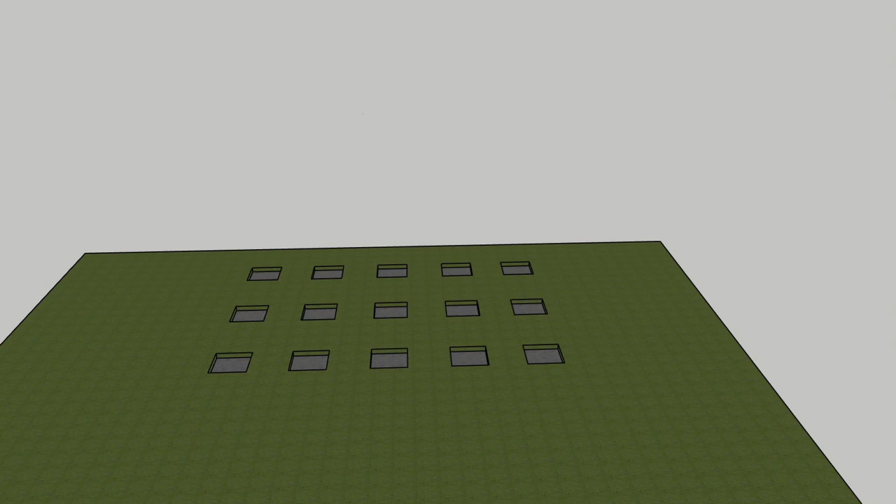Today we're going to be showing a video on how our garden rooms are constructed. This example is for a timber base, so we basically start off by digging some holes in the ground. They're going to be 40 centimetres by 40 centimetres by approximately 50 centimetres deep. It will depend on the ground makeup where you are.

Not all ground makeups are suitable for this design, so it's imperative this process goes correctly to ensure that you have a garden room that's going to last many years. These pads are normally about 1.2 to 1.5 meters apart. We normally put 3 rows in. That will cover us up to garden room depths of 3.6 meters. If we went beyond this, we'd need to put an extra row in.

So we've got our holes all dug in here. From there, we put a base pad in. So basically, these are designed to keep your timber floor off the ground. Timber framing largely uses treated C24 grade timbers. It's class 2 timbers, so it's not designed to be used in direct contact with the ground. So if you want your garden room to last a long time, you need to keep a good 50mm air gap underneath to prevent the timbers getting in contact with excessive moisture.

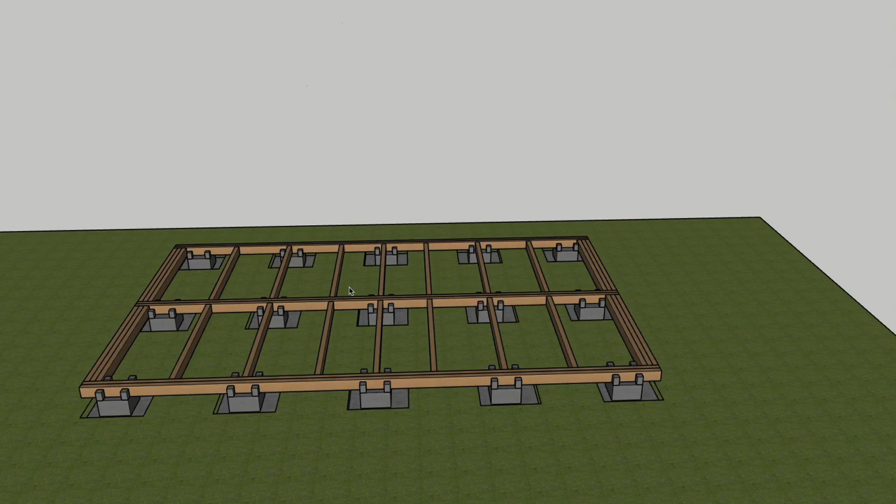From here, once all that's in and level and happy, we build some floor joists in for you. And as you can see here, we have got a double trimmer at the front and the back. That is to support the walls. If we only had one timber there, then it's going to allow too much movement in the wall timbers. On the sides we've got a triple. Again, we've got a double to allow your wall to sit on, and then we've got another timber which later will support your floorboards.

On the ends, they're all screwed through from both ends, and they are then kept in place using joist hangers. So they're kind of belt and braces to hold it all together. Floor is probably the most important part to get right, because the last thing you want to have is a garden room that lasts but the base starts to fall away over time. So this is a good proven method to keep your garden room off the ground and stable.

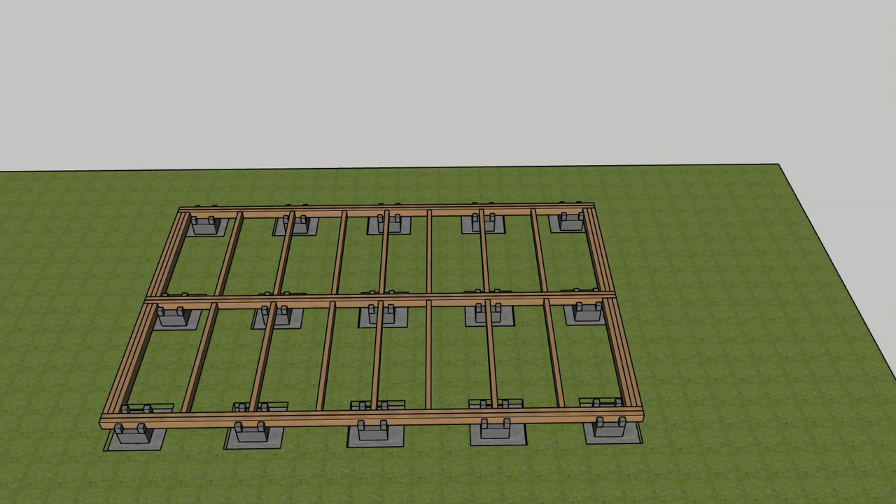Once we've got your floor timbers in, we will put some insulation. We use 50mm PIR insulation. That's similar to Celotex and other brands like it. So what we do to stop that Celotex falling all the way to the floor, if there's any expansion and contraction of the timbers, is we put a 50mm roofing batten along the bottom edge of the joists, and then the insulation just goes down and sits on top of that.

You want to make sure, obviously, all these are nice and tight when they go in. Any air gaps where cold air can be sucked into the building is going to risk water vapour forming and then rotting out the bottom of your garden room. So you want to make sure it's nice and tight. Any gaps can be filled with expanding foam.

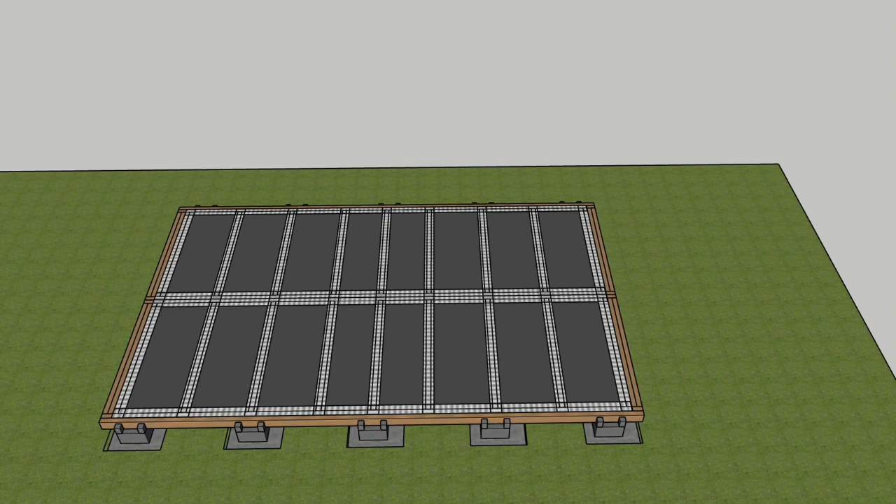Once all this is in, we then insulation tape. So it's a foil tape. We tape up all the joints, overlapping all of it. One, it helps reduce thermal bridging on the timbers by reflecting heat back into the room, and also eliminates any risk of air getting into the build.

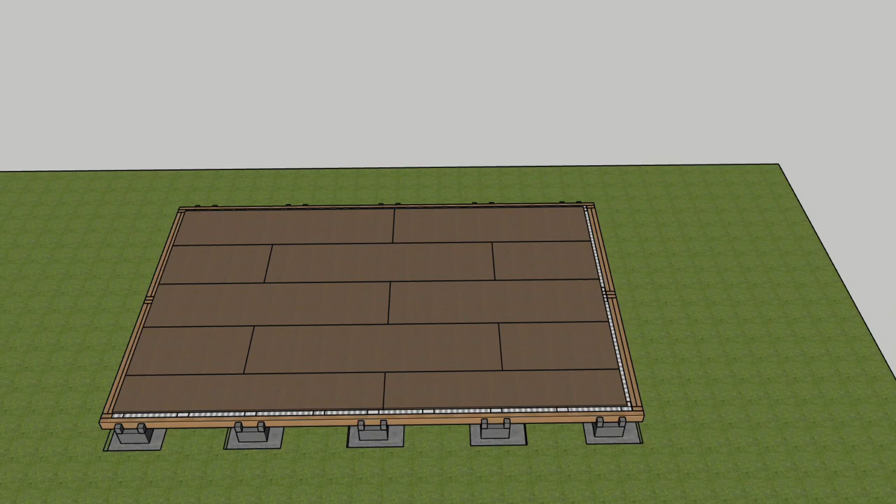On top of this, we installed 22mm caber flooring. Now our studs are at 600 centres, unless there's heavy equipment going in. So 22mm gives you a nice solid floor. All of it's glued and screwed down to the joists, so there's no chance of that moving. Nice, strong, stable floor. We then start with wall timbers.

So the wall timbers, we use a 4x2 stud frame, and as you can see here, it's going to be quite strong. We've got all these timbers at the front here, and there's a reason for that. We've got our lintel up here, and we need to ensure that our lintel is properly supported. We have 2 timbers underneath it, so that gives us 94 millimeters of bearing space to transfer the load of the roof that's going to be pushing on this top plate down onto your wall studs.

We put an extra one in here. That's simply so we can fix the lintel through to these and help tie all that together. On the corners you want a double trimmer here, and then that will allow this wall stud to be fixed straight through to that.

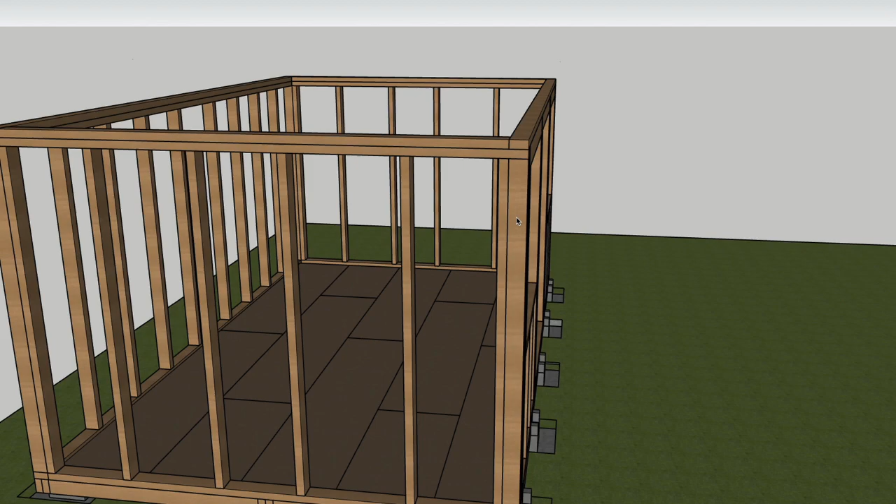These windows are 1.2 meters wide, and the French doors will be 1.4 meters wide. For this, our calculation came back with a 5x2 or a 47 by 125 millimeter lintel. That is doubled up, and they have to be bolted together to ensure they act as one.

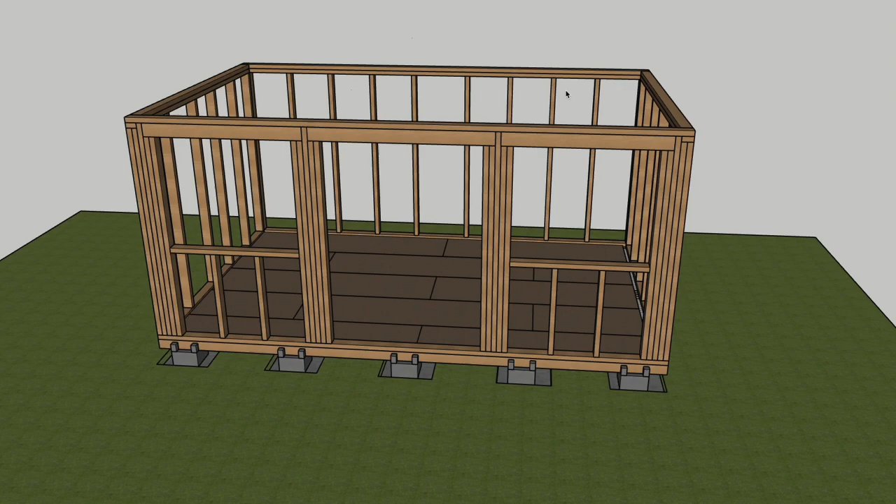We then have a top plate. This holds everything together. It also helps distribute the weight of the roof evenly down throughout all the studs, and the same reason for the back. We've got a double trimmer at the top, so if you've got a ceiling joist, roof joist in the middle of that, it's going to help transfer that load across to your upright studs. And that's basically your studs.

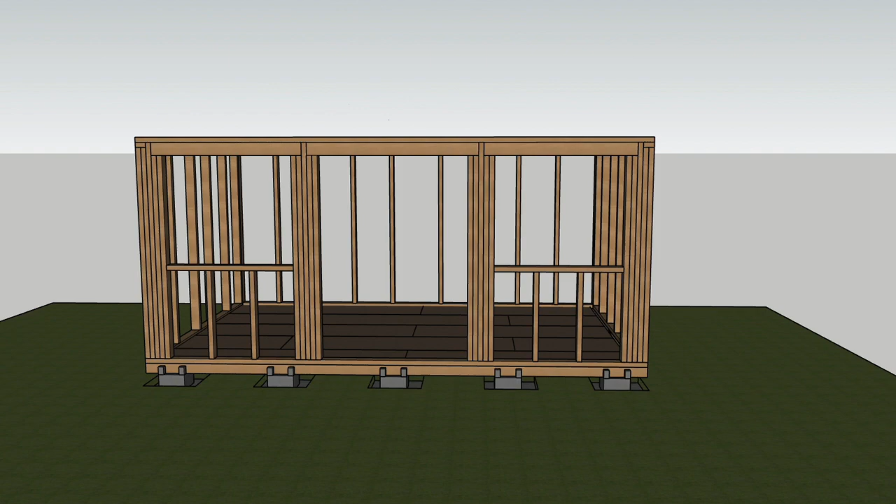The only thing we've not drawn in yet is our centre noggins, and that's to help tie all the walls together and stop any bow or twisting as the wood settles over time. Okay, so once we've got all our wall studs in, we're going to install OSB sheathing. So this is oriented strand board, sometimes called Sterling board. We use 11mm thick boarding, and the whole idea of this process is to strengthen the walls.

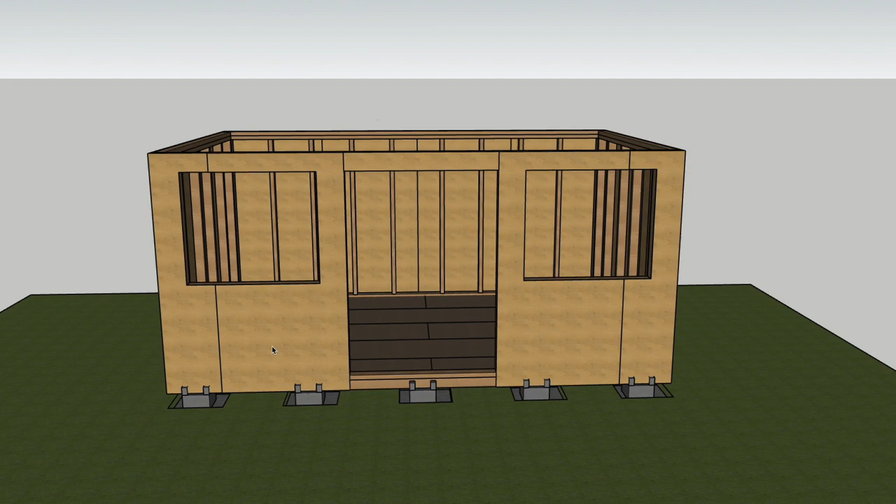At the moment, without the sheathing on, you would have a risk of buckling and twisting. Sometimes under wind force, you've only got to look at an old shed. When you look at an old shed, it's no longer upright, it's all twisted and buckled. And the whole idea of this OSB sheathing is to stiffen up the frame, make sure that it can't move. Okay, we nail this every 12 inches onto all of the studs, and that then holds it nice and solid.

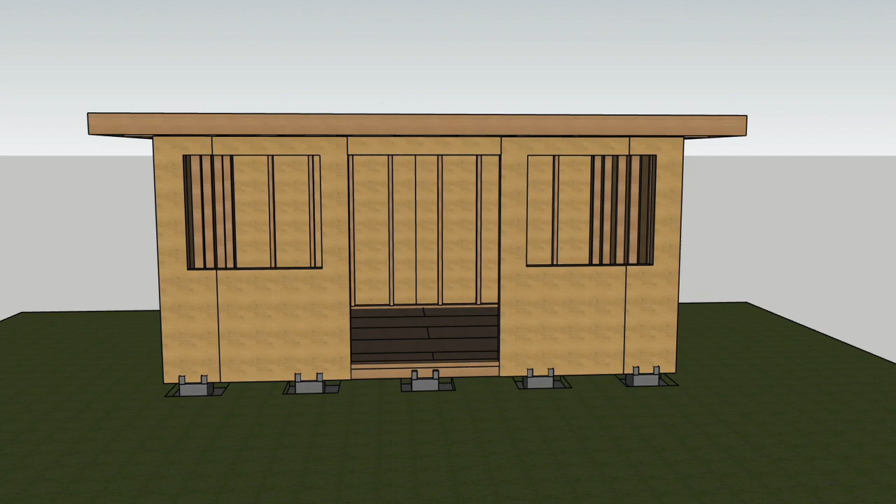We then install roof timbers. So as you can see up here, we've got all our roof timbers in. We always put this perimeter timber on, and there are 2 reasons for this. One, as it's fixed through here, it prevents the ends of these timbers from twisting over time. And that is the very same reason you have to put these noggins in the middle as well. It's just to help stop those timbers from moving over time, because they can twist and buckle. Wood is a natural product, so it will move over time, and the idea is to prevent that movement, so then it's forced to set in a particular way.

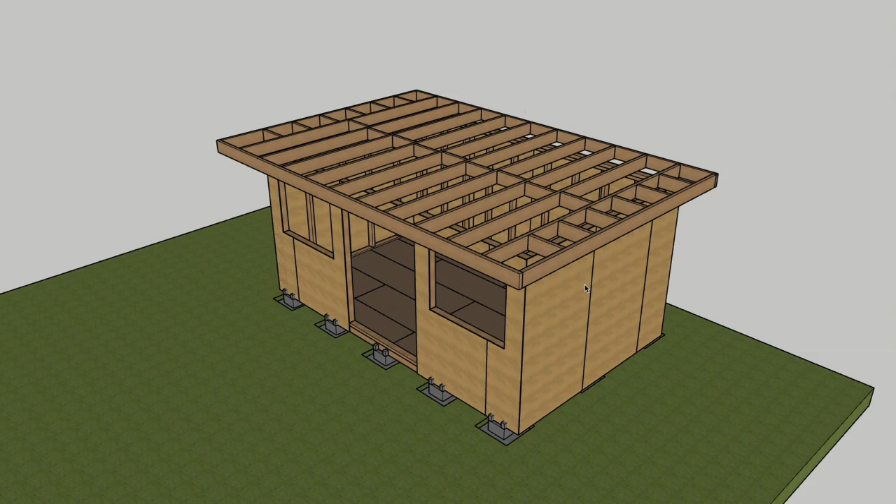We've got our noggins coming across here for our overhang. We normally do a 300mm overhang, and there's a reason for this. When rain is coming down, you want the roof to take the burden of the rain. The more water you have going on your cladding that will be on the outside of this garden room, the greater the risk of it rotting. So you want to make sure that this overhang prevents as much water as possible from hitting the cladding. It also helps prevent a little bit of splash up from the ground as well.

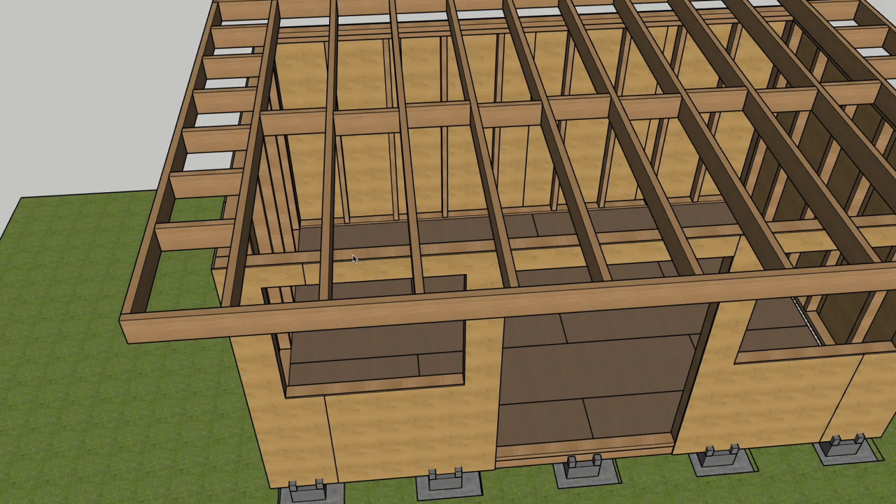So all these timbers are in. We use upside down joist hangers across here to tie them into the top rails of the garden room. This will hold all your roof in place. It'll be nice and rigid, it's not going to move anywhere, and it also helps with uplift from wind. So when the wind comes in and it blows under here, there's a risk of roof movement unless you fix it down sufficiently.

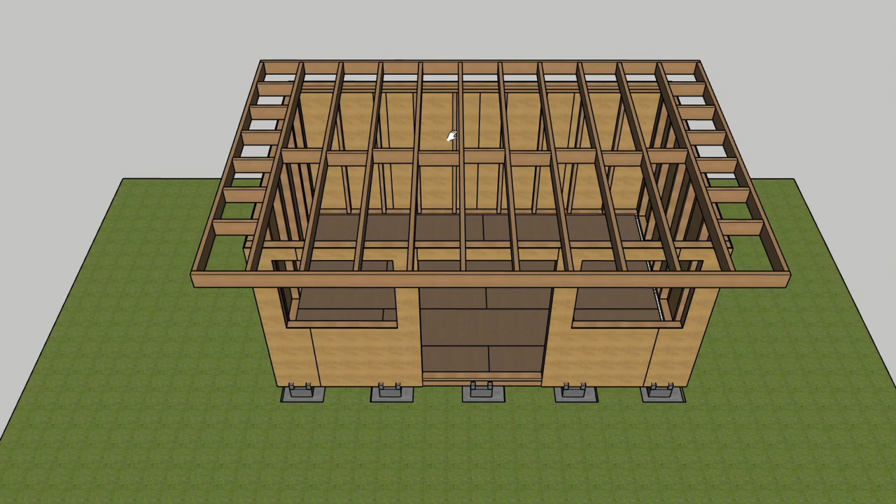Right, so once we've got all those items in place, we then look to put the OSB lower deck on. So again, similar reasons for the walls. This sheathing will help stiffen up the roof structure. We use 11mm OSB to help reduce the thickness or the profile of the building to give you as much headroom inside as possible.

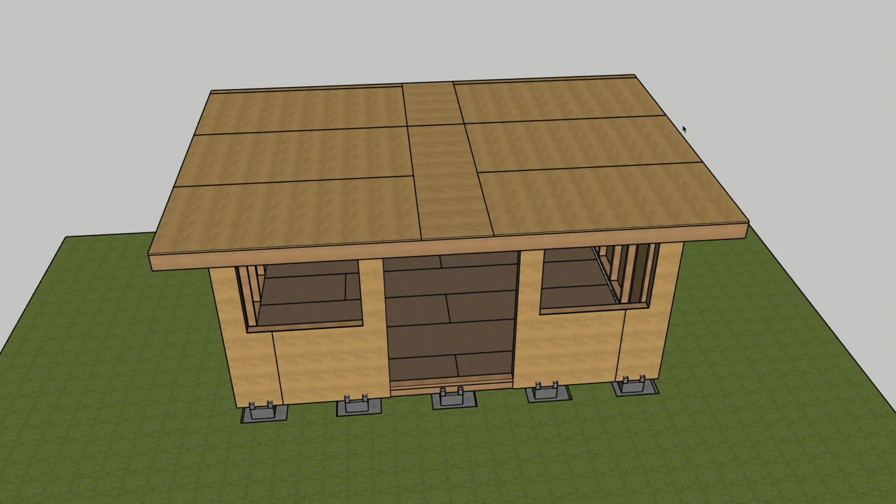Once all this is screwed down, we then want to install a parapet. So this is a 4x2 parapet that goes all the way around the garden room. This will help stop the insulation coming out. It will give you a nice solid surface for your fascias to nail onto, and also for your EPDM trim covers and for the top deck that will go on in a second.

So this is an example of a warm deck roof that we do more often than not because it's more thermally efficient, it's less prone to issues, so it's just the best method. The loss is you lose about 4 inches of height on the inside of the room, but with our garden rooms we still manage to maintain about 7 foot of headroom, and we think it's a reasonable offset to have a better quality, more thermally efficient roof.

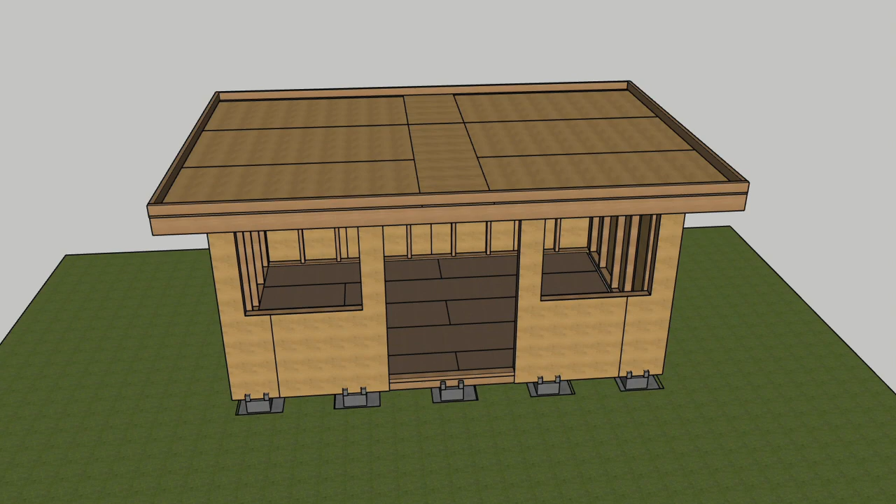From here we install a self-adhesive vapour barrier. So the idea of a warm roof is if there's any risk of moisture getting into the roof, we don't want it to penetrate the build. So this is a self-adhesive vapour barrier. You can use a primer with it, which will make it stick even more. We tend to find that we don't need it because we're going to use mechanical fixings for the top layer of OSB. So we're not too bothered. As long as it's stuck down to the OSB relatively well and it's sealed to itself, that's all we really need it to do.

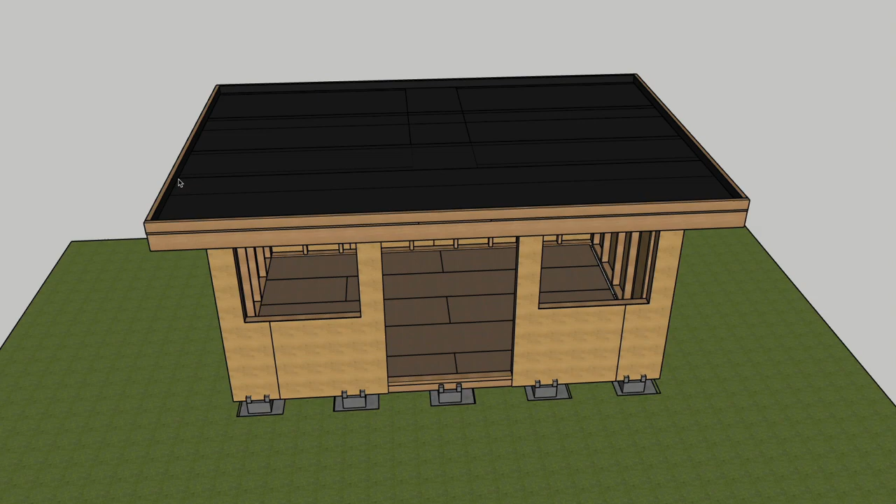Some people will use a polythene type vapour barrier for this. They're not as suitable, they're nowhere near as good as this self-adhesive membrane. When you screw through this, it seals better around the screws than what a plastic would do, basically. So there's less risk of failure. It works out to about £7 to £10 a square metre more expensive on the roof, but by far a better method of doing a warm deck roof.

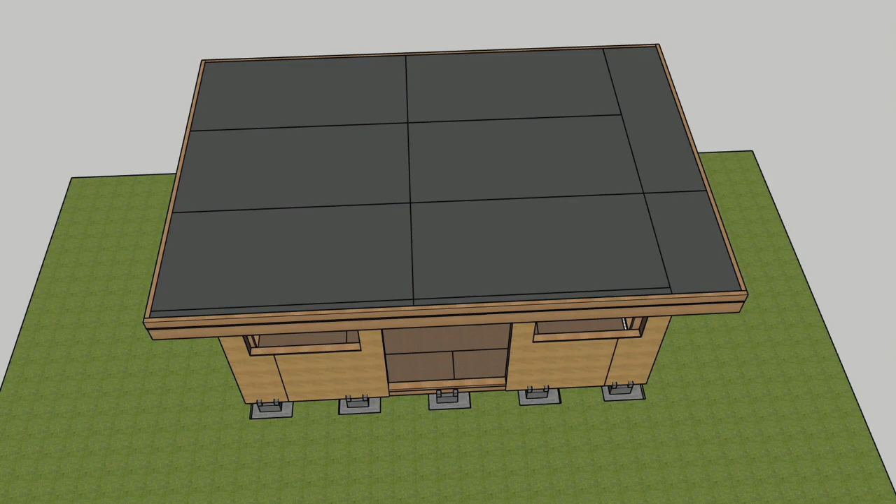From here we put 100mm PIR insulation into the roof. You want to make sure all of this is nice and tight. You don't want any trapped air in there because trapped air will hold moisture. Moisture will condensate and evaporate as the building heats up and cools down several times a day. So nice and tight. Get a hammer and block and you want to knock all these sheets in so they're nice and tight. As with the floor, we want to tape all of our joints.

Okay, so once all these are taped up and looking good, we then put our upper deck of OSB on. Now you can glue EPDM rubber straight to your insulation, but for the sake of 11mm and the cost of what OSB is, it's not really worth it. This will give you a much better quality roof deck. Now, as before, we said we use mechanical fixings. So along our parapet edge, we will nail that with 50mm Paslode nails, approximately every 200mm or 8 inches, and that will get all nailed down.

In the middle, we will follow where the joists are, and we use very long screws. We use 170mm long screws. That ensures we get about 50mm into our joists underneath to hold that nice and tight. It's a really tight sandwich between the 2 layers of OSB and the insulation. So any air that might have been trapped in there is just forced out when it's all screwed down nice and tight.

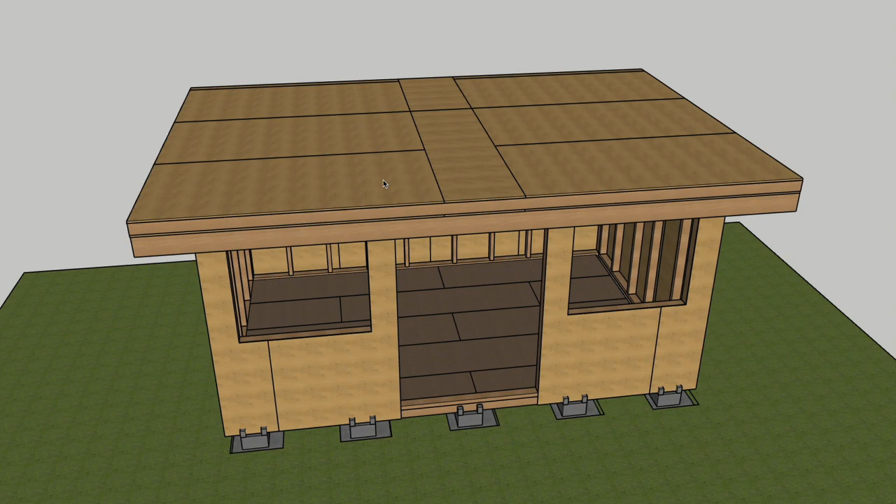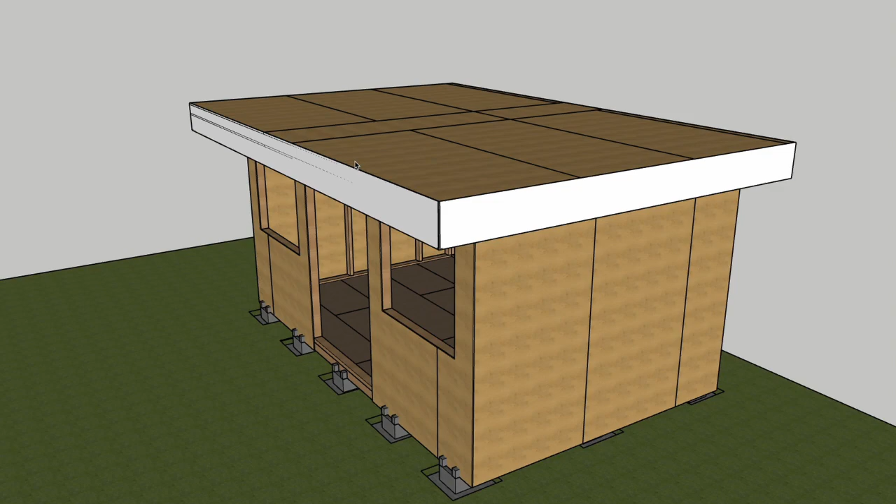So we've got our walls, we've got our roof. Now we want to start making this waterproof so we can start working on the rest of the build. So we're going to go around and put our fascia boards on. Okay, it's going to finish flush with the top here. There is a good chance you're going to have to trim the boards down to the correct height. It's so rare that you'll be able to buy a board that will fit the thickness of your roof. You normally have to buy one size bigger and just rip them down with a circular saw, or use a sharp handsaw. Either way, just trim them down, nice tight fit on there.

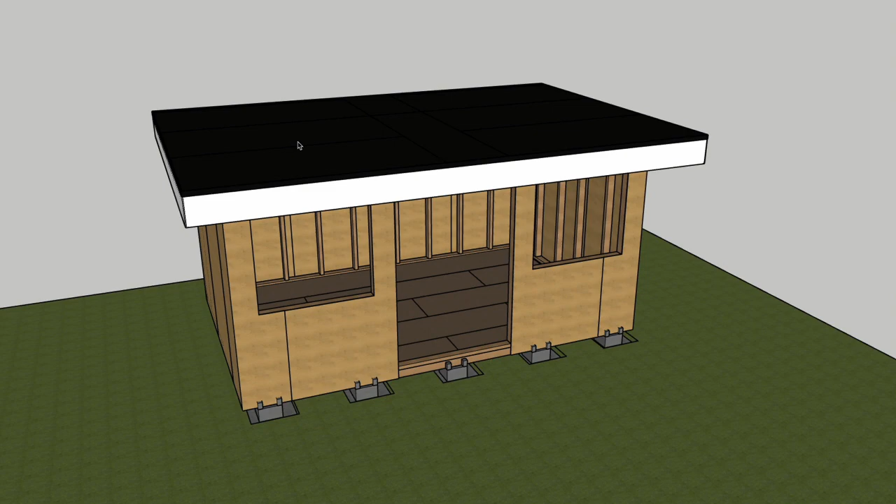We then lay our EPDM rubber on the roof, and you're going to want to leave that EPDM rubber for maybe an hour, 2 hours, maybe longer in the winter months to let all the creases where it's been stored fall out. If you get most of your creases out now, it's going to save you a bit of hassle when you come to glue it down.

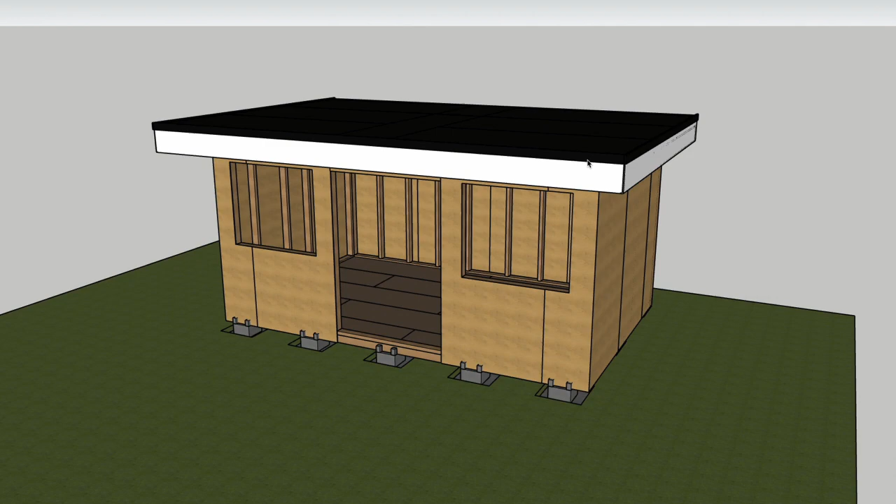Okay, so once all the EPDM has been glued down, it's going to overhang the edges by about 50 to 60 millimeters. We're then going to install our EPDM trims, and the trims just trap the rubber between the fascia board and the trim. They've got a gasket seal on them, which then seals the roof. You will have curb trim around all your raised edges, and then you'll have a gutter trim, which normally comes in 2 parts along the back. And then you've got a nice waterproof room that you can continue to work in.